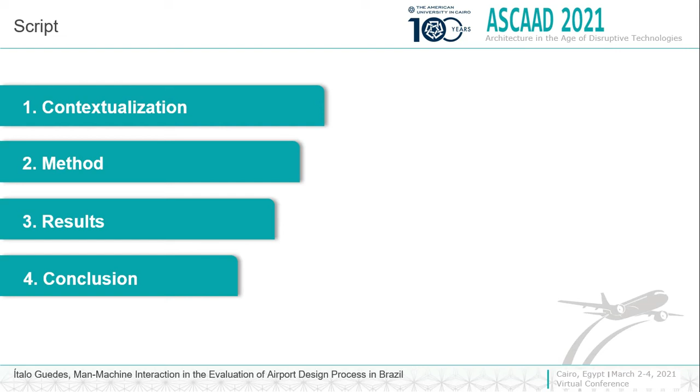I will follow the sequence present in this script.

Brazil is the second country in the world with the largest number of airports, thus the improvement of development and analysis process of airport projects has enormous potential to further leverage investment in this sector.

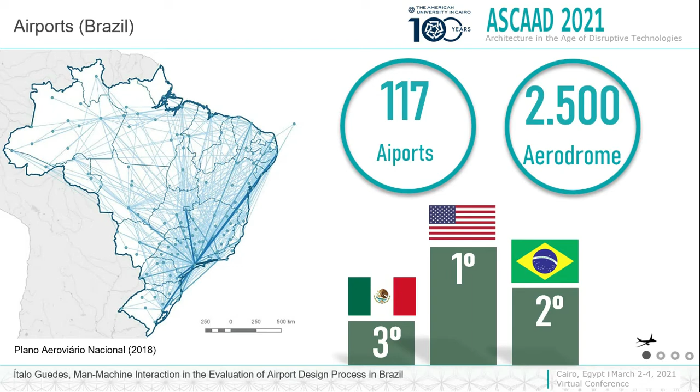In the past, the design of an airport was designed specifically according to the requirements of the aircraft that would operate at a given airport, with a required limited program of needs.

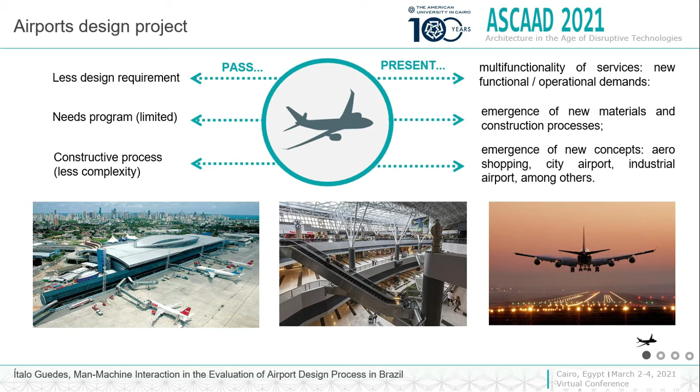Currently, as a result of several factors such as proximity to demand generation centers, multifunctional services, the emergence of new materials and good construction processes, and the emergence of new concepts, the design of an airport has become a complex activity.

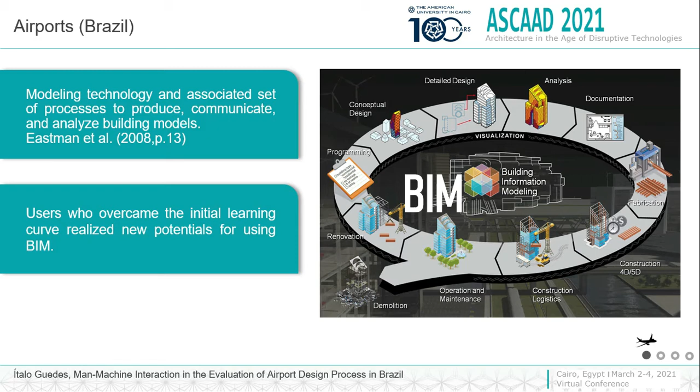The use in the AEC industry is affected by the increasing maturity of users, with new types of uses being explored among the concept.

Bilal Succar defines the use of information in three categories: use of the model, use of documents, use of data. In the category of use of the model, there are three subcategories: general use, domain use, custom use.

In the domain use subcategory, there is the series 4000, where it is possible to find the specified use for code check and validation. The expression code checking is one of several ways of using the BIM methodology.

The term can be found in manuals around the world, such as the Project Execution Planning Guide, National Guidelines for Digital Modeling, Statsbygg BIM Manual, among other documents.

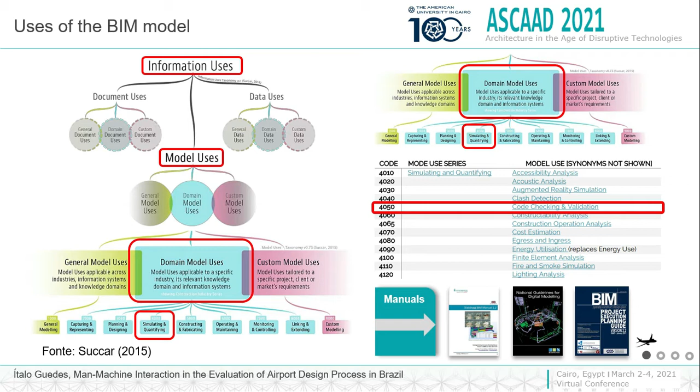The methodological process of this research is based on design science research. This research is currently at step 1, construction of the artifact. We hope to be able to proceed to step 2 soon.

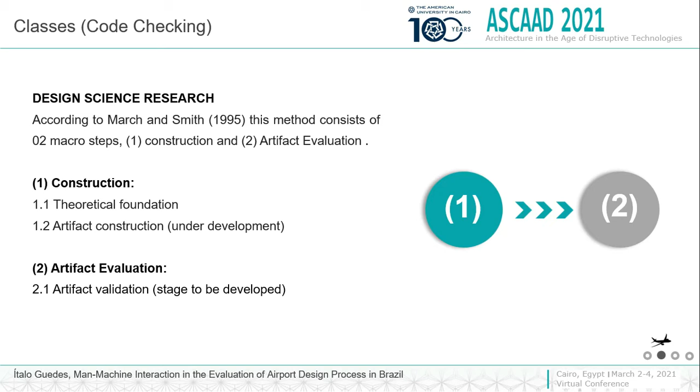I will present the preliminary results of this research.

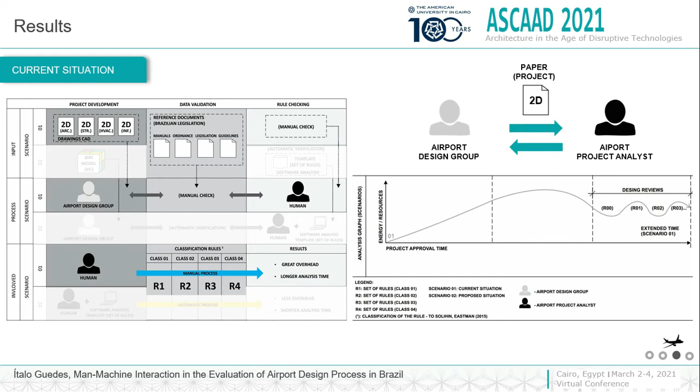The figure present on this slide refers to the manual process of evaluating airport projects in Brazil. The designer develops the project and submits two-dimensional documentation to the team of analysts.

In the process proposed by this research, the airport project model is developed by the design team in BIM software and exported via IFC to the team of analysts. This proposes the creation of an evaluation model that considers the human-machine interaction in the evaluation of airport projects in Brazil.

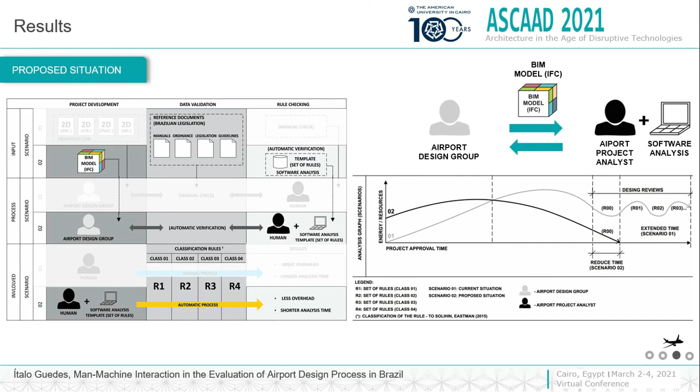This model goes through an automatic verification process using the Solibri Model Checker analysis software. After verification, an automatic technical monitoring report is generated, indicating whether the project was approved or not.

Once the properties and parameters necessary for the creation of the rule have been identified, it's possible to build a conceptual structure throughout 6 highlighted groups. When changing information in one of the groups, it's possible to obtain different results.

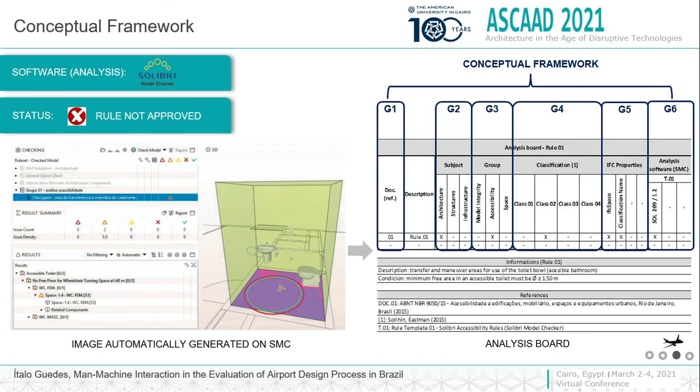Throughout the development of this article, the potential of this approach to analyze several project disciplines was also observed, creating rules that analyze all the project parameters, such as service level, airport certification, among others.

It was verified that there is the possibility of replacing the analysis software group of the conceptual structure with an artificial intelligence system, using machine learning, enabling a new interaction between man and machine.